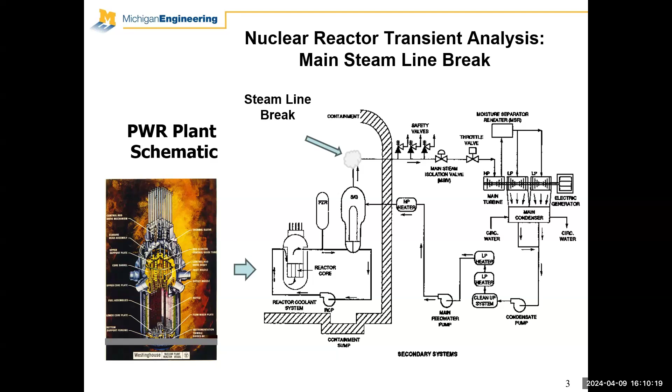Perfect. Let's give this to the newspaper guy. All right. So next day he comes back in and I said, all right, here's the specs for the problem. This is an OECD benchmark problem. Here's the RELAP manual. Here's the PARCS manual. Have at it. And we never expected to see him again. Three, four weeks later, he comes back and he says, I think I got it. And I go, got what?

And he says, well, I've got a model of RELAP modeling the core. So this is the core. Okay, these are all the channels. This is the PARCS model, every fuel assembly in the core, and then broken into 18 thermal fluid channels. Okay. And then what we're doing is we're mapping. This is the PARCS nodalization axially for every one of these fuel assemblies, and this is the RELAP nodalization. Okay, so you're going to be mapping this and doing this coupled field for 100 seconds, time stepping.

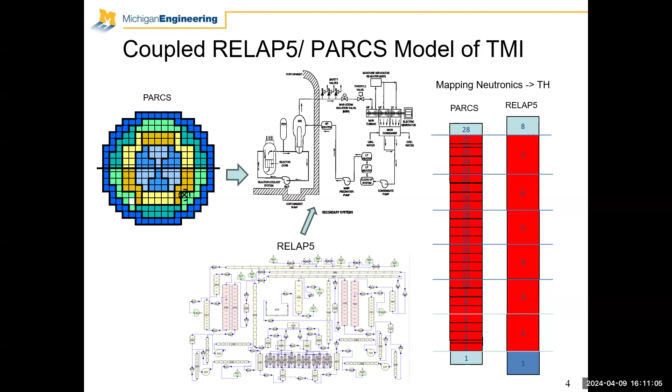Okay, very complex. Okay, I said it's impressive, but does it work? Well, reactor scrams after the event, and then slowly, in this particular scenario, what we do is we look at the power, return to power, and sure enough, he modeled it. Okay, all right. The rest is history. Thomas, I said, gee, he's good. We're going to keep him as a graduate student working with the group, and we did.

And then of course, he went to Sweden, taught at KTH, did the stability benchmark there. But the story is interesting because when he became a grad student, he's sitting down in the office working, doing his thesis research. And every now and then a young student would come up to me and say, well, I've got a problem here with my model or whatever. And I said, well, go see Thomas. He's really good at this. So he would go down and approach Thomas, tell him the problem.

Thomas would look up at him and say, read the manual, except he would put a colorful adjective beginning with an F in front of manual. And the students would come back almost in tears. And you know, I guess it worked because eventually a lot of them got it. So I don't know if you're ever working with Thomas, RTFM.

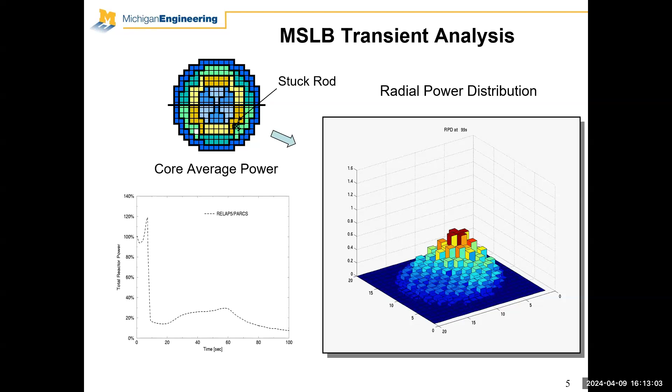Okay. This past summer, we had a reunion at Purdue. And this is interesting because, after 28 years working for the NRC continuously, that's because I've always had really good people to do the R&D and the maintenance of the code. This guy here was actually the guy that first wrote the first few lines of the code, Han Joo. He's a professor at Seoul National, and he's now the president of KAERI, which is the Korean research institute. This is Yunlin Xu. He's a professor at Purdue. And then he took over for Han, and then Thomas.

And then down here is Andy Ward. And Andy is now the current PARCS guy. He's taking care of the code. And this guy here wrote the code that I'm going to talk about today. It's Volkan Seker. He wrote the AGREE code. So over the years, I've been very fortunate in having such capable students, PARCS first, and then AGREE. But there's one we did for CASL called MPACT. Michigan Parallel. I named these codes after wherever I've been. I guess not so with AGREE, but Michigan Parallel Characteristics Transport.

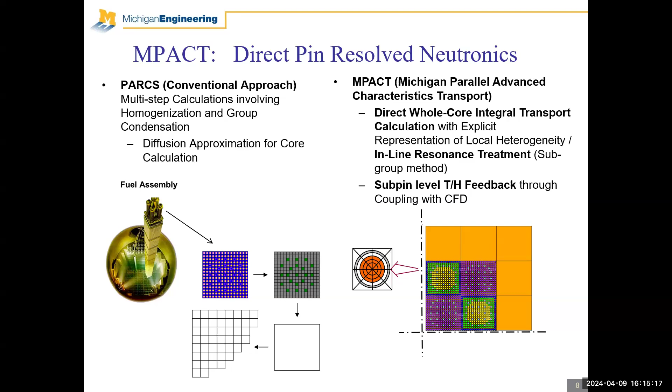And then again, this was one of the key codes in the CASL project. So what I'd like to do today then is focus strictly on gas reactors and advanced gas reactors. And this AGREE code has been very important for industry, Kairos, X-Energy, and it actually began being developed by the NRC.

What we're doing is solving the temperature, fluid, and neutron flux equations for two different kinds of HTRs. One is the prismatic design, in which the TRISO particles are in these compacts, which are inserted into these blocks. And the other is the pebble bed reactor, where the pebbles are put into the core, and they contain the TRISO in this tennis ball size.

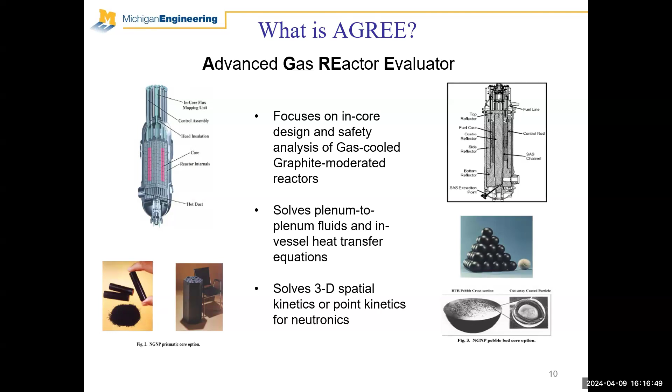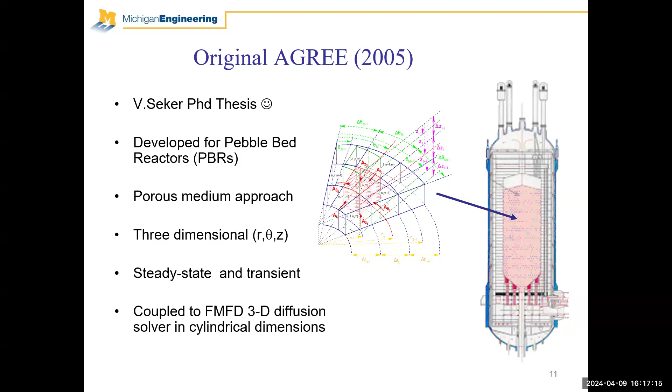So the AGREE code itself began as Volkan's PhD thesis, way back in 2005. Originally he was developing it for the pebble bed reactor using a porous medium, three-dimensional thermal fluid solution. And it was doing steady state and transient for the various accident conditions. That project was not funded. We were doing it because that's what he wanted to do, and we were able to find GSIs and things like that for him.

Then what happened is the NRC got an application from the DOE NGNP program, and they funded us to develop AGREE as a prismatic, and they actually named it AGREE. It stands for Advanced Gas Reactor Evaluator. So we did that for several years for the NRC, and then most recently, the NRC has turned to the MOOSE package Pronghorn, and released us to create derivatives of AGREE to work with Kairos, and now with X-Energy. And we've also been using AGREE in collaboration with Argonne to look at the Magnox reactor.

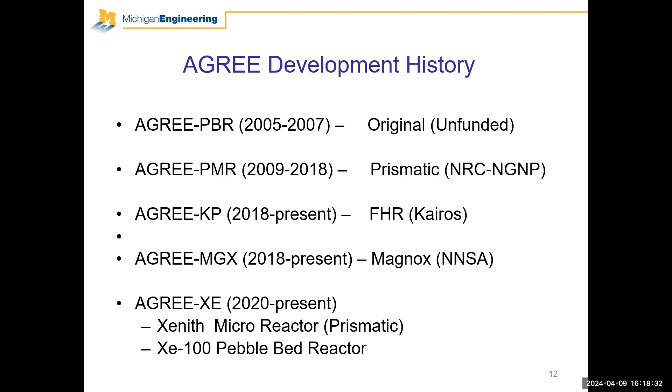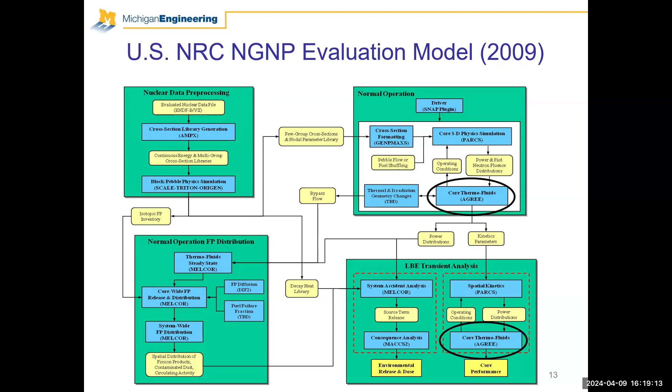So what I'd like to do is show you a little bit of the background on each of these, a little bit of the methods, and then talk about the applications in the ARDP program. This is the NRC's evaluation model, and the role that AGREE was going to play. This is their plot, and they're looking at normal operation and transient analysis, but ultimately what they're interested in is the release and the MELCOR code. So it was SCALE to PARCS, AGREE, and then transient, and then supporting MELCOR.

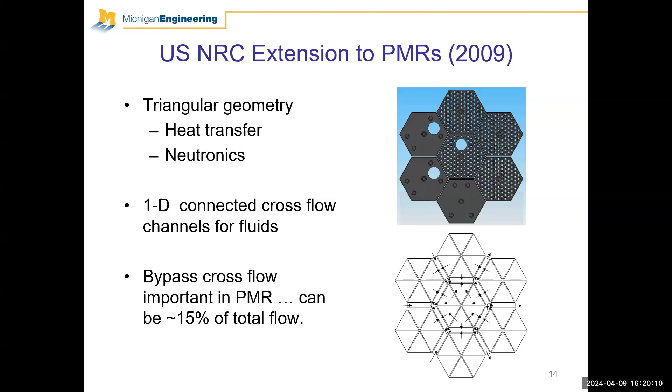What we did for the NRC, though, is we had to sharpen the modeling to account for some phenomena that happen in a graphite block system. Specifically, over the course of time, the graphite tends to deform, and a lot of the fluid that you think is going to cool the fuel now goes into these bypass regions. So we had to come up with a way of treating this cross flow, or the bypass flow. Bypass flow is important. It can be on the order of 15%, specifically further on into the irradiation. So that was one thing that we really had to work on.

And the extensions we did for Kairos about 2018: the original AGREE, then they put the prefix KP, Kairos Power. Addition of FLiBe properties, and FLiBe caused some special concerns. We had to start treating the pressure and temperature dependence of some of the coefficients in the momentum equation to handle FLiBe, which is very temperature and pressure dependent. And then this is just a schematic of the FHR.

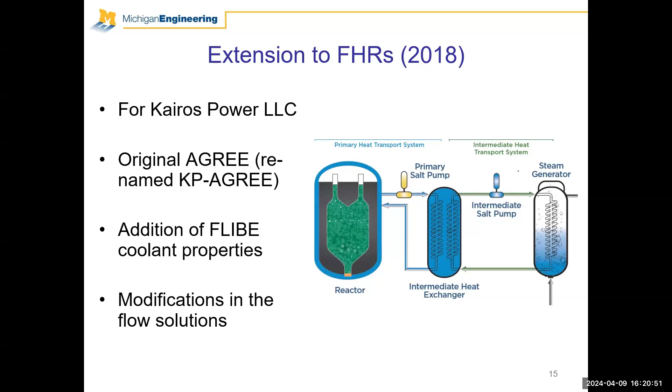The Magnox reactor, this one was really interesting. Oak Ridge was approached by NNSA. This was a non-proliferation issue, so they wanted to find out how much plutonium was there in some of the Magnox reactors in the UK. And what we did is we coupled AGREE to the MPACT code, which we developed. So that was, for us, nice symmetry. We developed MPACT, and now we were coupling it with this gas dynamics code AGREE.

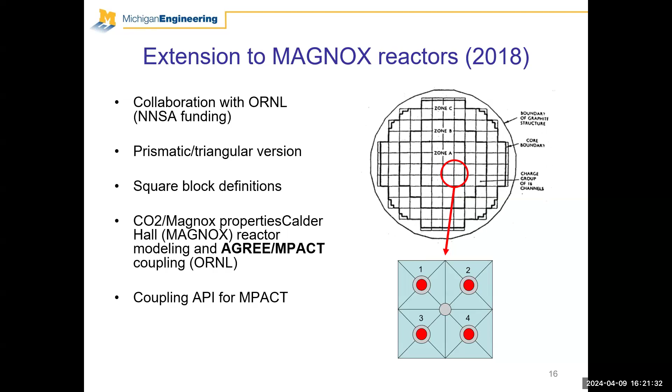But the application that has been most satisfying, a lot of fun for us, has been X-Energy. With X-Energy, we really have done two projects: one prismatic, one pebble bed. The pebble bed is the level 1 XE100. It looks very much like the pebble bed that's being built or is already built in China. So we think it's a good technology, and we're helping with the design basis events necessary for the PSAR.

This one here is the micro reactor, and originally X-Energy was part of the Pele project. BWXT won phase B, but now X-Energy is back designing a mobile reactor, and so we're involved in that work, okay? And it's for the Department of Defense. Unfortunately, I can't talk much about that or this one, but I will talk a little bit about this one here.

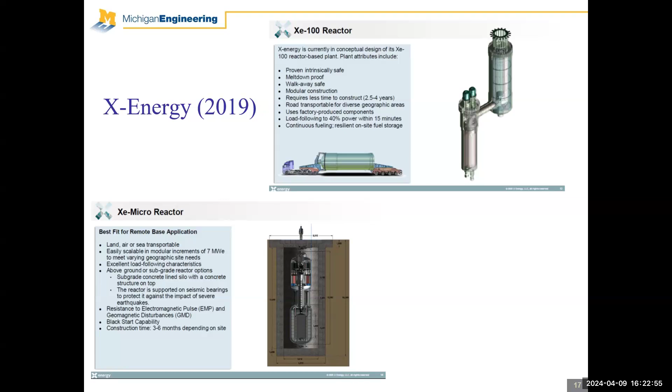So let me walk you through just a little bit on the methods. One of the innovations that we think we introduced was using the Monte Carlo code Serpent to generate cross sections. Typically, codes like CASMO, HELIOS, the SCALE package, Polaris were used. Deterministic codes have been used. But to overcome a lot of the complications of that, we decided just to bring the hammer and generate cross sections. And this really had two advantages.

We would generate the cross sections using Serpent, pass them into our converter, right? Homogenized group constants into our converter, doing this in whatever, 8, 10, 14 groups, okay? And then do a deterministic steady state, but then transient calculation.

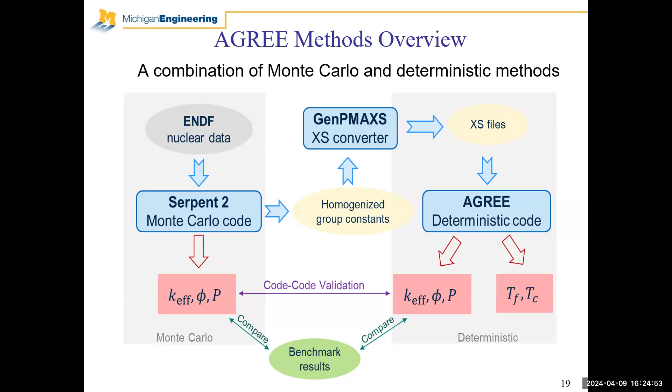Okay, so the obvious benefit of this is, let's say you're doing some benchmark or some core calculation, the good news is you also have a full core Monte Carlo calculation to then compare to the deterministic calculation, which used homogenized cross sections for each one of the fuel assemblies or pebble regions. So this provided you with a self-consistent way of understanding some of the limitations of the deterministic core calculation, okay? So that was one of the benefits of this technique.

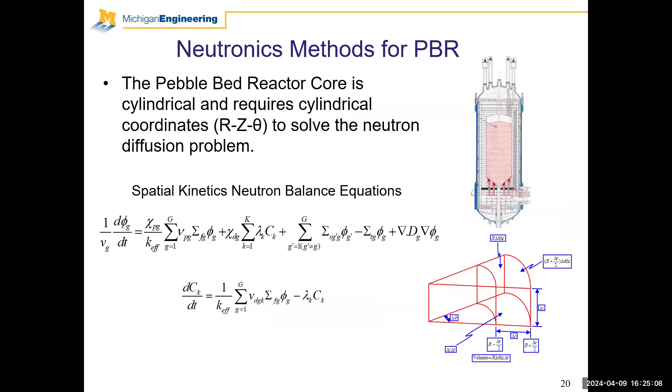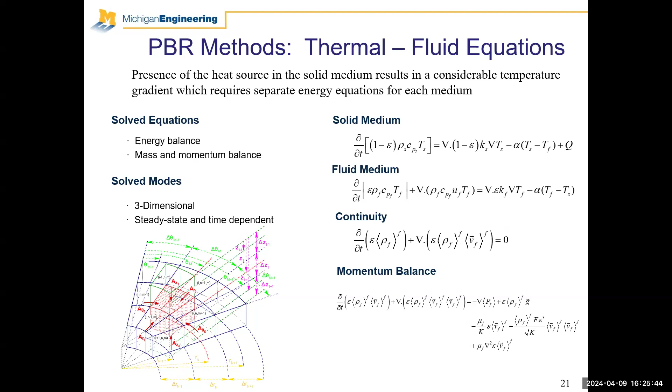The core solution in AGREE is pretty standard RZ theta stuff. We have both a nodal solver and a finite difference solver, okay? Thermal fluid equations, porous medium, solving for the solid, fluid, continuity, and then the momentum balance equation. And those of you that have done work with HTRs know there's a lot of subtleties here, the temperature dependence of the conductivity, things like that. So you bring all of that to bear, the constitutive relationships.

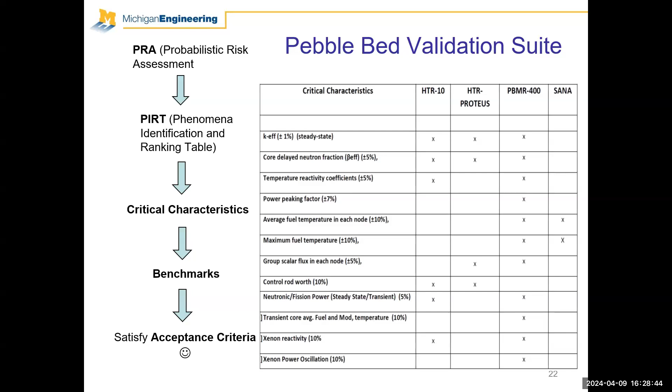So this was going to provide us with code comparisons. Let's say you've got 10 countries around the world that have codes and they want to compare them. From that comparison, you can get a sense of what we can loosely call validation. And then SANA was a German facility where there were actually some tests. So I'll just show you very briefly each of those, one slide. This is SANA, okay?

It's just electric heaters in a pebble bed. These heaters were used at different power levels, okay? And then AGREE modeled this, and you see reasonably good comparison, okay? So this gave us confidence in just the temperature fluid calculation, okay?

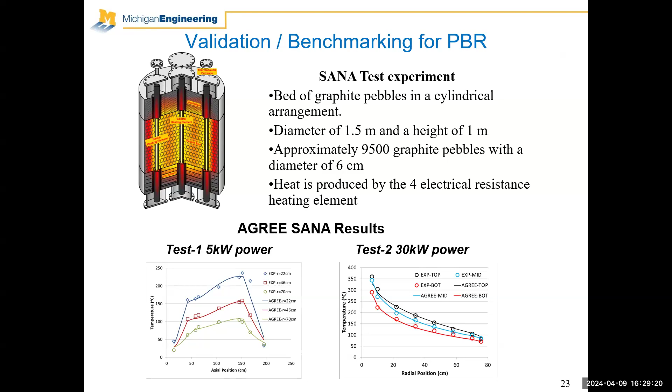And then for getting the pure neutronics, you went to a critical facility, and this is HTR-PROTEUS in Switzerland, okay? There were many cores. For this, we did 5, 7, and 8, okay? And these are the different things that were measured. The good thing about these experiments is that, like a lot of things the Swiss have done over the years, it was very well measured, very, very good instrumentation.

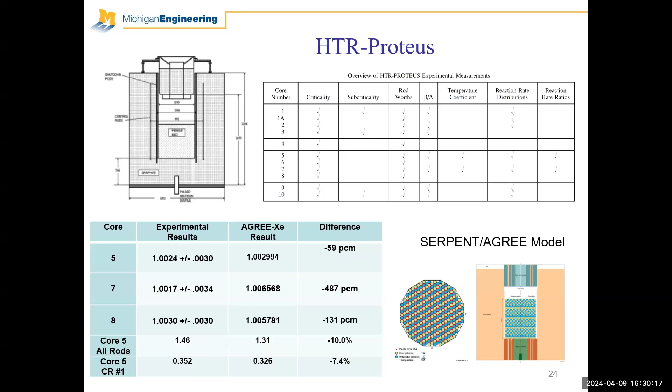So again, we modeled this with Agree and compared the results. This is Agree with Serpent cross sections, and you can see that we are within our acceptance criteria. Okay, so that's the temperature field, the neutron field, and now what we did is the coupled temperature fluid field,

and that's HTR-10. So this was an IAEA benchmark test done back in about 2003. And they did a bunch of steady state coupled field, and then they did some transients. They did an ATWS transient benchmark. And you can see these are the comparisons for the steady state. There were some thermocouple measurements, different rod worths, critical height, reactivity coefficients, rod worths, things like that.

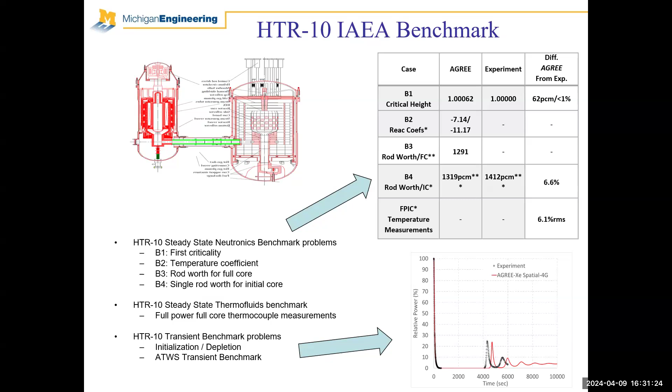And then this is an experiment they actually did, the ATWS, and then seeing the return to critical, okay? And again, the experiment and then Agree, and it turns out that's not too bad. So that is giving you a sense of what's necessary to satisfy someone like the NRC, that your code is capable now of being used in the safety analysis of an entirely different machine than those benchmarks. But you've demonstrated that you can get certain critical characteristics that were available through experiments.

I'm not going to take you through the prismatic, but the prismatic also has benchmarks. The HTTR, this is a Japanese reactor, 30 megawatt reactor, and after Fukushima it's back operating now, and they just completed another test. They did a loss of forced convection. And there's benchmarks, the MHTGR benchmark. This is just a code, much like the PBMR 400 is.

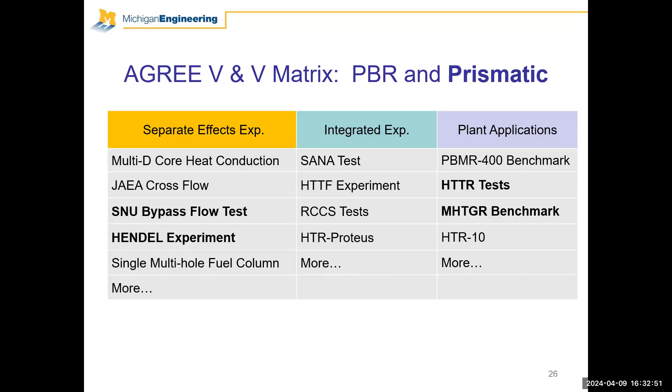But there are other experiments, HENDEL, SNU bypass. These are just thermal fluids experiments. And the issue there is a lot of importance on bypass flow. Can we predict that fluid that's going between the blocks? Okay, so that gave us confidence in our ability to model the HTR for both the pebble bed and the prismatic.

And so now I want to walk you through some of the applications. The first one, for those of you familiar with the ARDP program, it's about $1 billion in total. Okay, and then for level one, there were 2 companies chosen, TerraPower and X-Energy. And they're getting, ballpark, about 80 million a year. And the target date is 2027 for them to be able to demonstrate the buildability. And the target place for the Xe-100 to be built is a Dow Chemical plant in Texas.

So I want to first start. Well, I just said some of this. Advanced reactor demonstrations, 7 years. We started about 2020, so about 2027. Level 2 is risk reduction for future demonstrations, and this is one that Kairos won. And then level 3, this is advanced reactor concepts, which will support innovative and diverse designs. And so the next slides I'll show you what we're doing with MIT. They have a level 3.

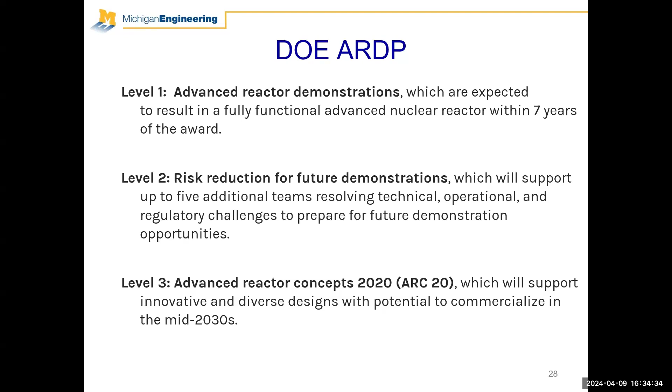This is the concept, again, led by Koroush Shirvan. He's the PI for the project. And it's a horizontal gas-cooled high temperature reactor. Prismatic blocks, I'll show you a layout of those in just a second. But the idea here is to reduce construction costs.

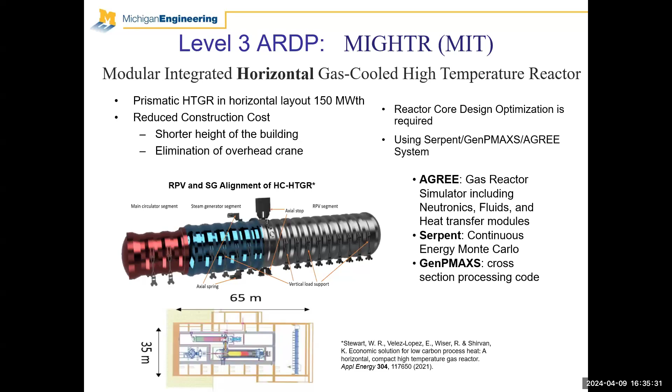I'm going to show you we're no longer using just control rods. We're using control drums to reduce the overall length of the machine. But the design is MIT's. They came up with it. We're co-PI because of Agree. They need our code to deplete and to do the transient analysis.

Okay, so this is a project we're doing with them, and we're in our 3rd year, and it's been a lot of fun. And what we've actually been doing is having senior design projects. So they just, in fact, emailed me yesterday that the group of seniors just went to the senior design conference in Penn State, and the ones that did this got the best paper, best presentation award for reactor physics. So that was great. I really felt good about that.

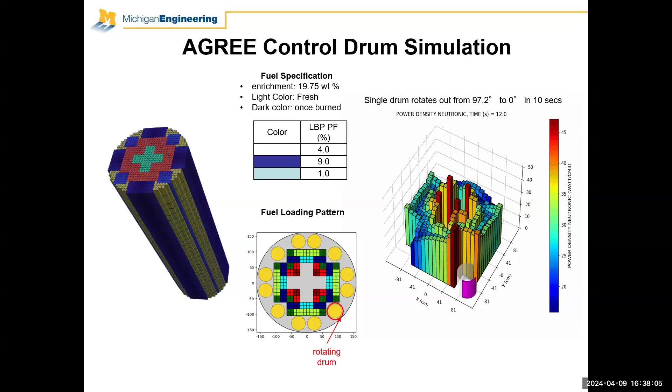And the nature of their project specifically was, find the best loading pattern for these blocks. See, you've got two batches of fuel, fresh and burned. Okay, and then you've got the degrees of freedom, not just radially, but these are stacks. Okay, so when you do the factorial, it's unmanageable. So they've developed simulated annealing algorithms, and they came up with some pretty neat stuff. So feel good about that.

Okay, this is a level 2. We supported Kairos for the FHR as part of the design and development of their FHR, but they don't want me to talk about that, okay? Because they're in the process of preparing their licensing. Instead, we also have an ARPA-E project with them. And in the ARPA-E project, what we did is we have a sanitized, we called it the GFHR. And we work with Argonne, who's one of the collaborators on this project.

And what they're doing is using the SAM code. See, so we have, again, Serpent-Griffin, the highest fidelity, and then what we're doing is generating the kinetics parameters for SAM, and then SAM then is training a digital twin, okay? So it's broken into a bunch of tasks. But one of the innovative parts of this is just seeing how good can you get with the digital twin.

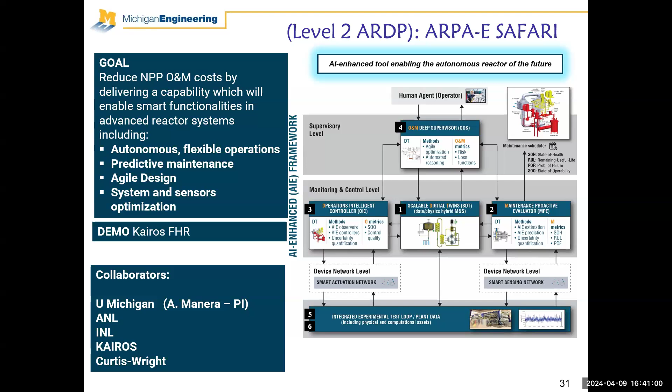This is a schematic of the FHR, GFHR. Okay, and what we have is, again, a SAM model of all of this, and then a Griffin model of all of this. We put features into the Griffin code. When we move a control rod in Griffin, the power distribution changes significantly. No surprise. But that's some information that we want to get to SAM. So what we've done is put a form function into SAM. So a few extra things we had to do.

But again, the digital twin, task 1, and the person doing that is not a nuclear guy. He's Aero, Karthik Duraisamy. Okay, and then my task is to kind of pull it all together. Rick Vilim from Argonne has been doing the control module, and then Humberto Garcia from INL has been doing the MPE and the ODS. But again, the key player has really been the digital twin.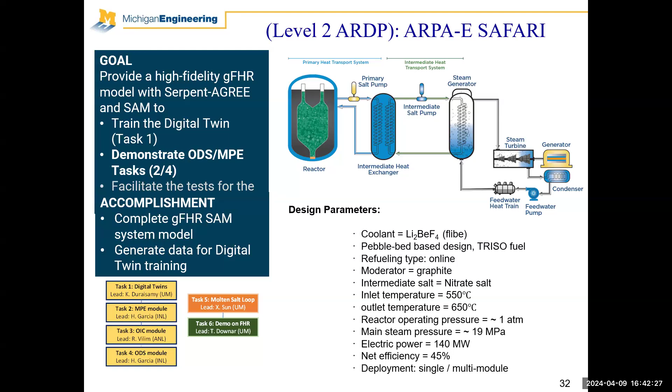The idea here is it takes many, many minutes for SAM to do a simulation. We want to get a digital twin to do it in milliseconds. And it's been successful. This is a schematic of how the pieces fit together. Again, we're led with Serpent. We model the FHR with Serpent-AGREE. Then we generate the reactivity coefficients and everything we need in SAM. And then this goes off and trains the digital twin. And then the digital twin is available to tasks 2, 3, and 4 to apply it.

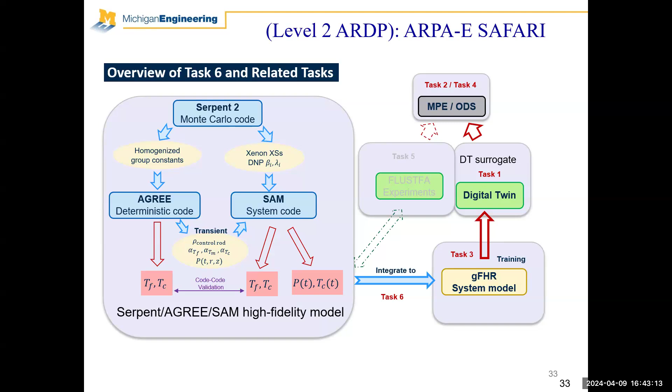The pump degradation has been the centerpiece of that. I have a very busy plot of how well the digital twin agrees with SAM and everything else. It's too busy. Instead, I'm just going to show you a core load follow simulation that we're doing. And the idea is this: we really are interested in, yes, sacrificing some accuracy, but getting these runtimes down, and having a runtime down here has allowed us to do an investigation of the degradation of components. That's the idea, okay?

Okay, so that's level 2, and then level 1, this is the XE100, and they're in the middle also of doing their PSAR. As we speak, it's still being written. Can't talk too much about that because they don't want us to get stuff out there that maybe is going to change. And so I'm going to talk about the events that we're doing, okay? But I'm going to do it within the context of the PBMR 400, which is very, very similar.

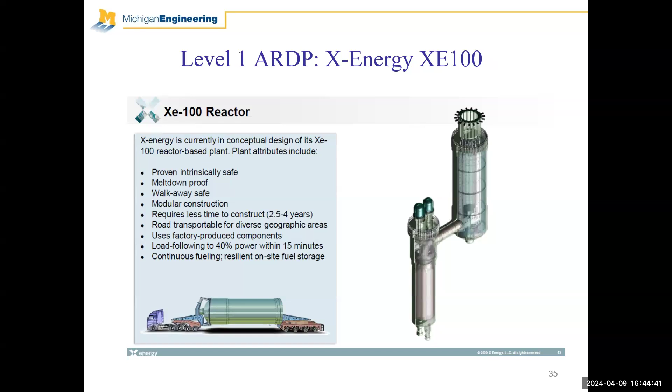What we're doing for them is, again, out here, AGREE. We're taking VSOP, which historically is a code developed in the 60s, 70s for the pebble bed reactor by the Germans. And basically, it depletes, takes pebbles, runs them through about 6 times, okay? And then what we are talking about is getting an equilibrium core condition, getting the isotopics for this equilibrium core condition, and then taking that and running Serpent. Because what we're interested in is that state point, right? Or the equilibrium core state point, and then doing transient analysis with AGREE, okay?

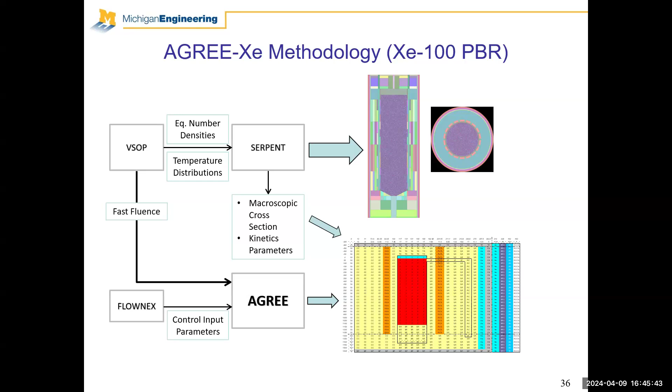All right. So this is, again, the schematic of the core. And I'm showing you here then this benchmark, the PBMR 400, okay? And for those of us that spent their career like I did in light water, this is really a change of perspective because now what we're looking at is 100 hours. Ride this thing out 100 hours because we get a return to criticality at about 50 hours. And I will say that we also get it with the XE100, but it happens. And the physics of that are really interesting. And you can see it down here looking at the reactivities, okay?

What you get is the total reactivity comes down because you got your Doppler, that comes down, okay? You have the moderator reactivity giving you negative, negative. But what's happening is the xenon, right? The xenon reactivity, this line here. The xenon is now decaying. It's no longer being absorbed by the flux, right? It's decaying only. And that decay of the xenon then gives you this large positive reactivity insertion, with the xenon half-life about 8, 9 hours. It takes several half-lives, and then you've got sufficient xenon reactivity that you have a return to criticality out here. That positive overcomes all of these negatives.

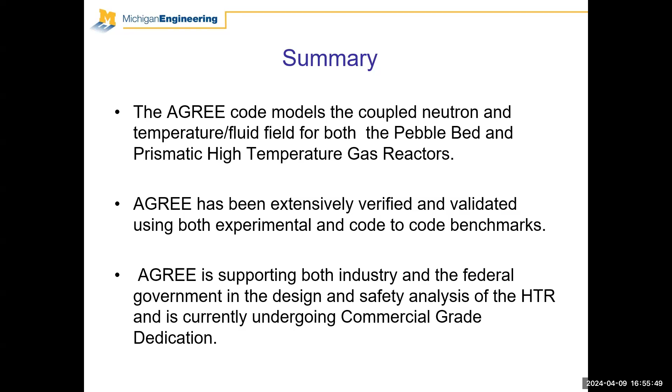Now, the good news is you don't change your power that fast. Physically, there's a ramp rate in the power that is slower, okay? But nonetheless, we find that the digital twin doesn't do well for things that are short in time. As far as accuracy compared to SAM, it's remarkable what they're able to do. This is a load follow, so it's just one case. Obviously what we're interested in is what we can do for transients: take a transient and be able to model that. You have to explicitly add things like xenon and samarium.

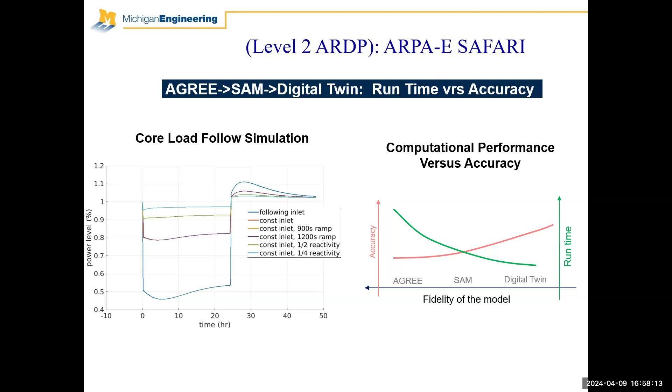How good is the data? And what does this data buy you in terms of, we're talking about building the XE-100 in Texas. Okay. In Texas, they're not going to have, I think, many Richter 7 or 8s, you see. And also, this was done with a very steady shaking rate. But the way earthquakes go, that can be a little bit random, right? It can start, stop, aftershocks, things like that. So it's really more just trying to get arms around the problem. But to answer your question, I don't know all the details on this. Okay, the paper.